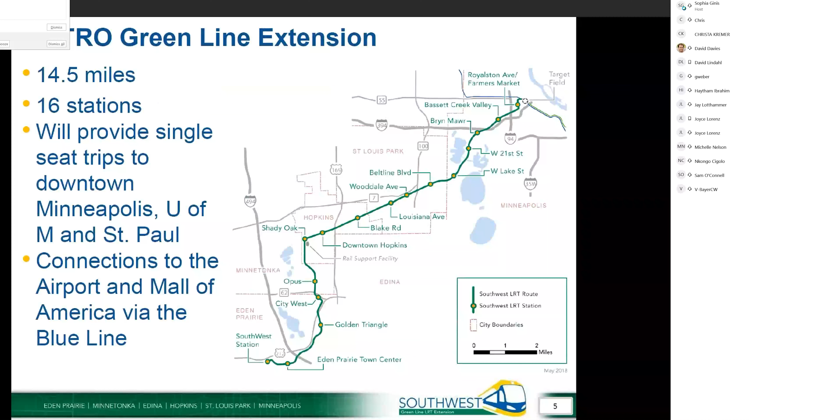Today we're going to do a little overview of the past year and what to expect. As you're probably familiar with the project, we are 14.5 miles with 16 stations, and not only can you connect to points along the line such as Hopkins or downtown Minneapolis, you're also connected to our regional network, allowing you to go on the Blue Line all the way to Mall of America or to St. Paul.

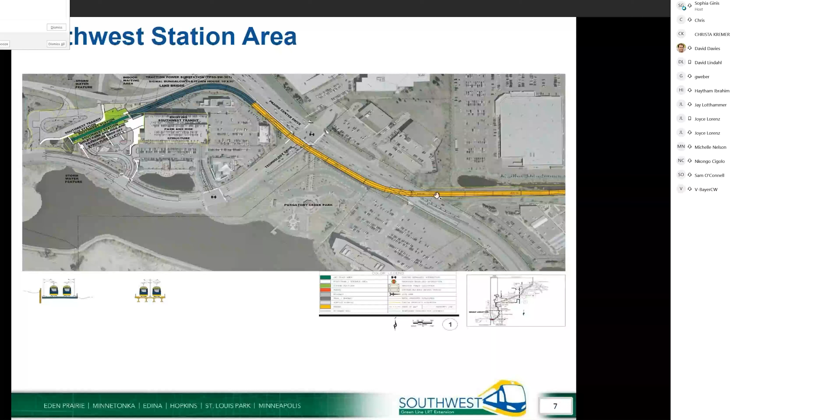We're going to walk through the alignment a little bit in Eden Prairie. To start out with, we have our Southwest Station, and from that we have a bridge structure that flies over Prairie Center Drive.

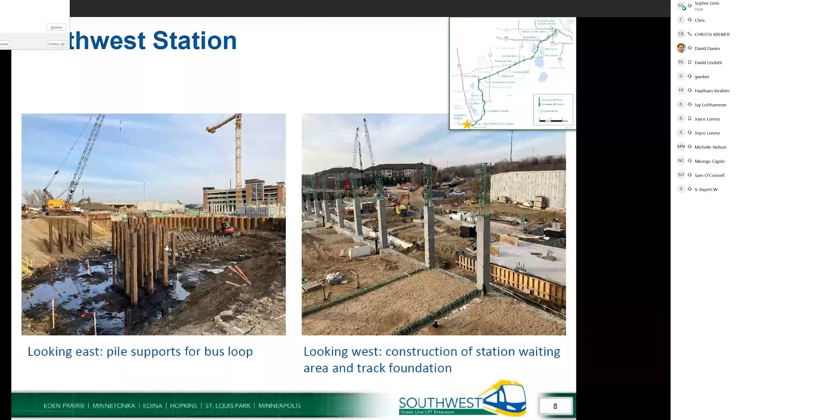Now, to put plans into reality, here are some pictures of what we've actually been doing on the ground. To build this Southwest Station, there's a lot of soils to be corrected and structures to be built. In this photo you see us expanding the park and ride structure, which is actually part of the station itself, and some of the infrastructure needs lots and lots of piles. So that is what we've been doing.

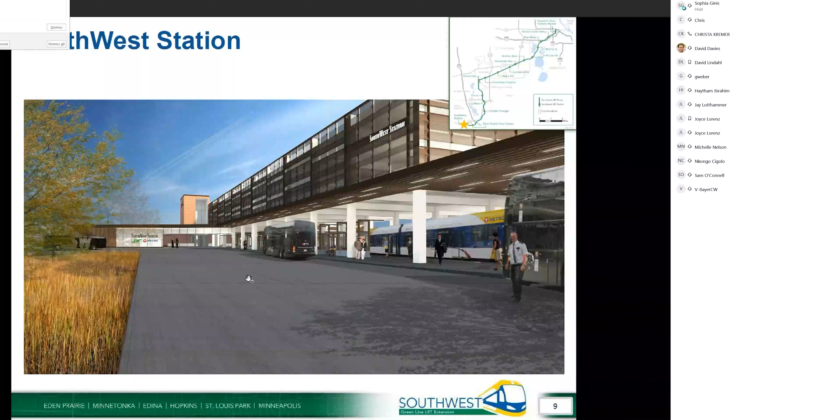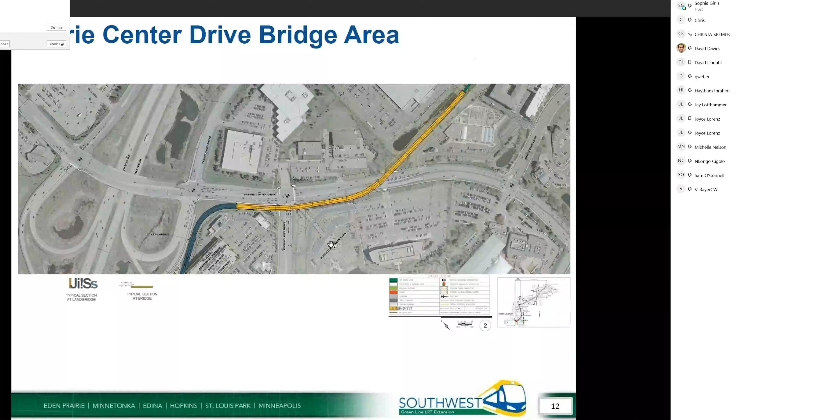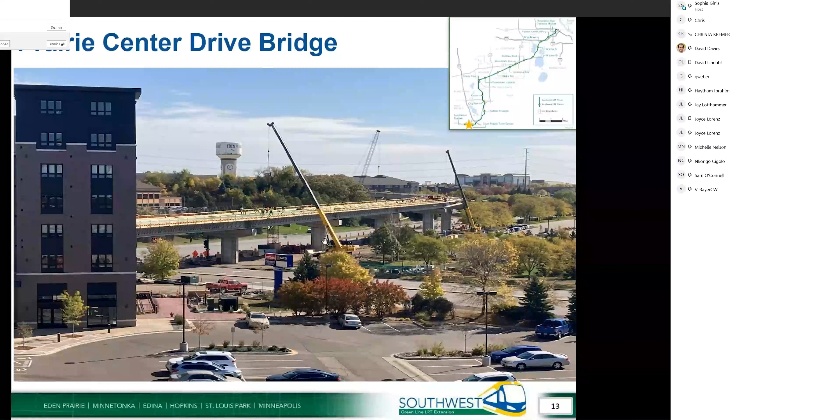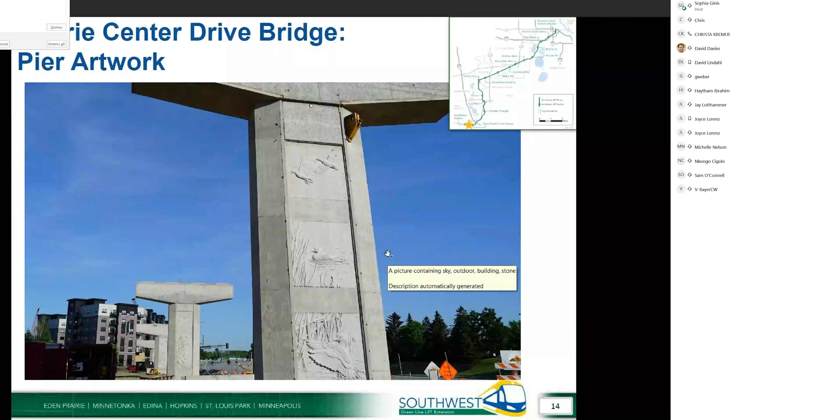Coming from the station, still seeing Southwest in the corner, we take a bridge structure across Prairie Center Drive. For anyone that's by there, that bridge is really coming together. Here is plans to reality - this is looking east towards the bridge itself across the roadway, in that parking lot. While this is before the beams were set, working with the Eden Prairie team, the Southwest team really made sure this bridge was aesthetically pleasing with some really awesome concrete insets. If you ever have time to wander that way, you can see the details on this bridge.

As we move on from the Southwest Station, our next station along the line is Eden Prairie Town Center, and that's also where we connect up with Flying Cloud Drive. I'll show you some of the work we've done in the last year in this area.

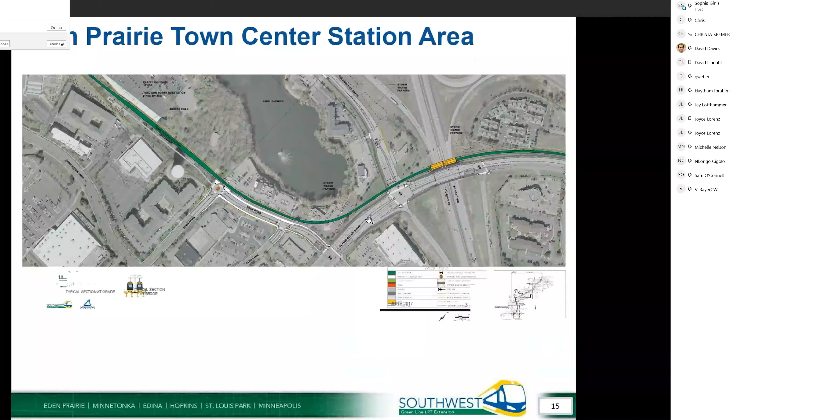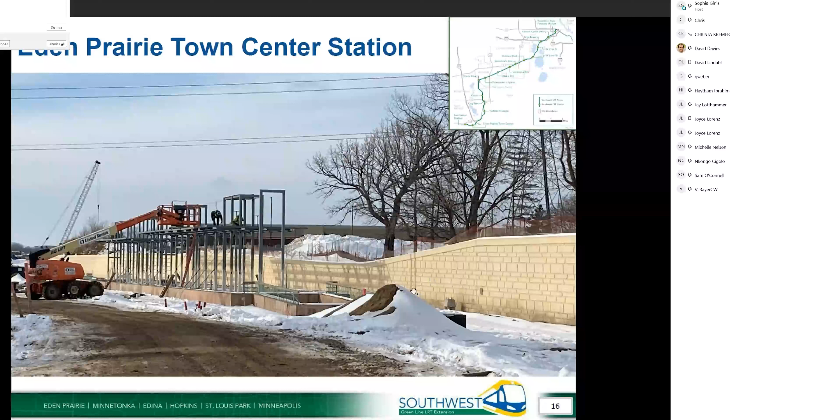So here's another station becoming a reality - this is the Eden Prairie Town Center station. You can see the structure starting to take shape and some of our retaining walls. We have quite a few retaining walls overall on the project.

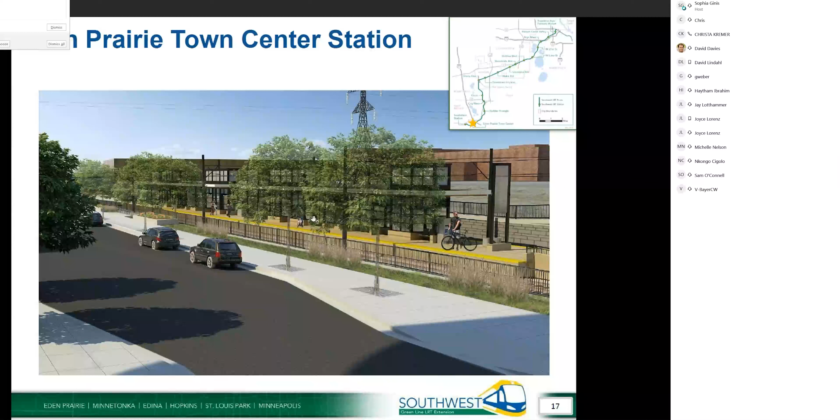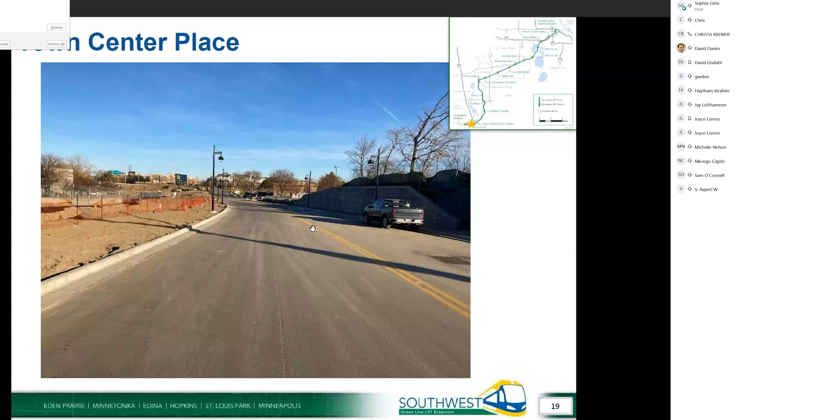I have a couple images of the roadways, and I'm bringing these forth for all of our residents and businesses that were along Flying Cloud Drive or Town Center Place, we had quite the construction season and had the roadways torn up for most of it. You can see the finished condition close to Town Center Place, as well as Flying Cloud Drive.

We'll get into this as we go through what to expect next year, but we have more work to do on Flying Cloud Drive. We were able to finish the first two phases, and we have two more to go.

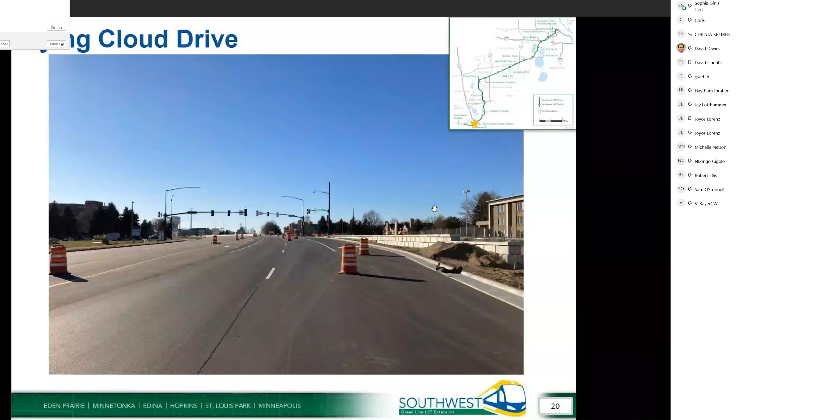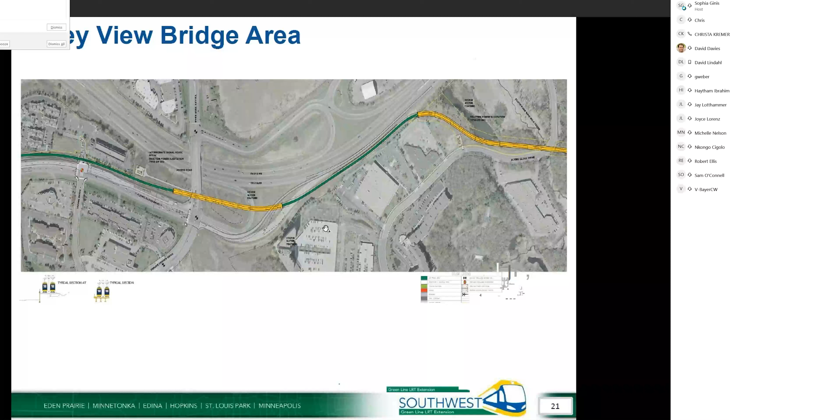As we move north or east along the corridor, we come into a lot of bridge structures, including the Valley View Bridge as well as the 9 Mile Creek Bridge. I'll have some photos of that. All these bridges together really show the structure that is Eden Prairie, and luckily we've gotten through much of the construction of a lot of them, so next year will be calmer in terms of bridges.

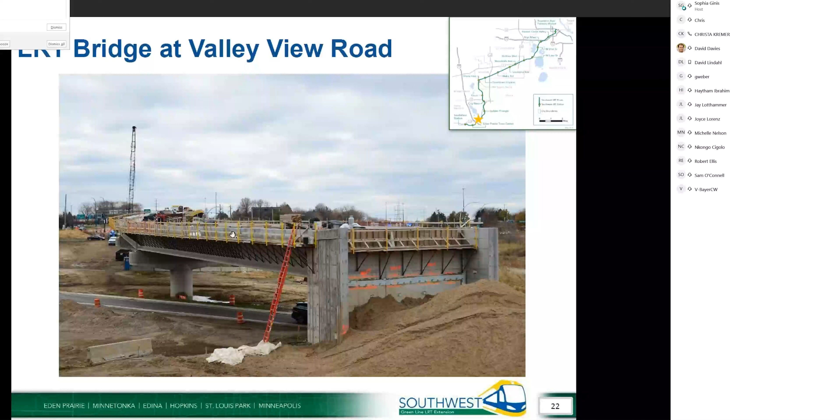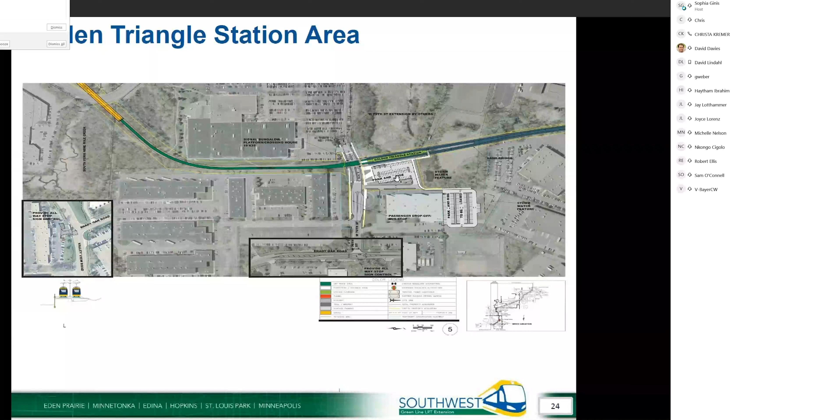Next along the line is our Golden Triangle Station and the associated area there. So again, plans to reality — the Golden Triangle Station has greatly taken shape over the last year.

You can see not only the station itself, but the support for the tracks that come around the station. A lot of Eden Prairie has soil correction to do, so they do a lot of either piling or removing and replacing soil to get it to be a place where we can build LRT over.

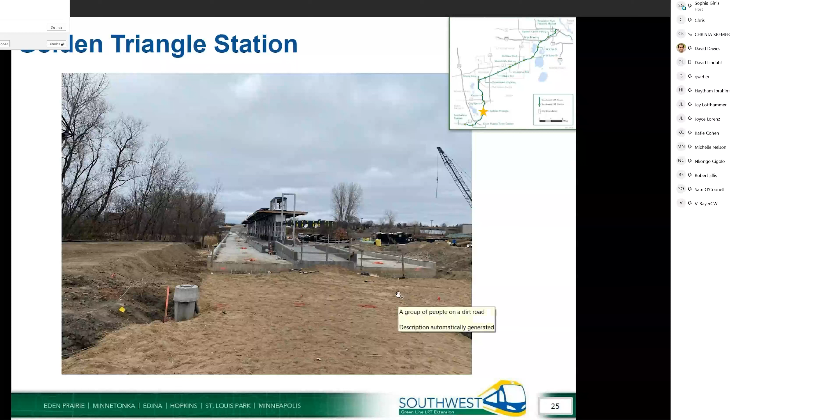Moving on, right after we leave that station, we have a big task to do, which is to get over 212. So we have a fairly large Shady Oak Bridge that goes over both Shady Oak itself and the highway.

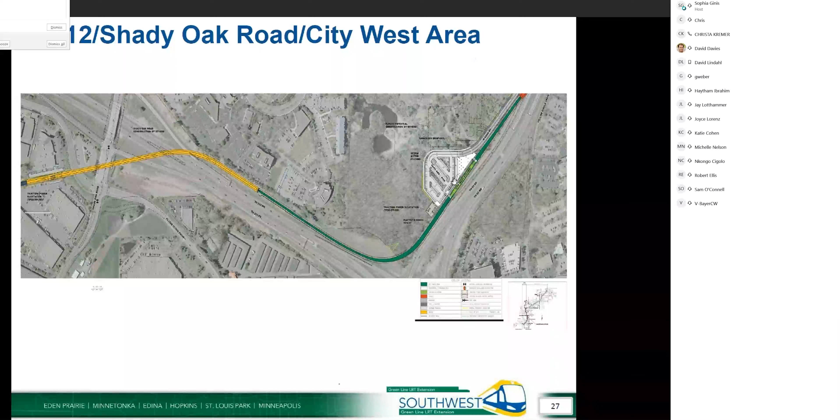We then come into our last Eden Prairie station, which is the City West station. It's located right by Highway 62, and then we dive under the highway in a tunnel. A lot of work has happened in this area as well to advance the project.

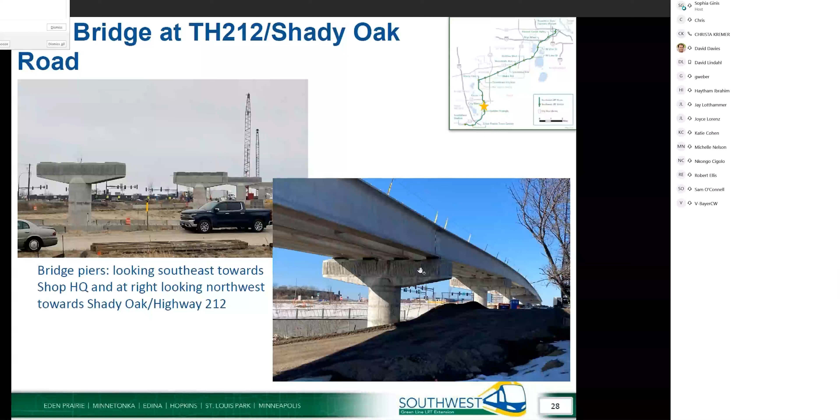Here is a view of our Shady Oak Bridge. Many of you got the lovely pleasure of seeing road closures on both Shady Oak and Flying Cloud Drive over the last few weeks as we've set these spans at the beams for the bridge itself. We still have the portion that'll go over the highway itself to set, as well as a lot of deck work to advance on top of these beams over the next year.

Here's what our City West station will look like once we fully hit reality, and not just construction chaos.

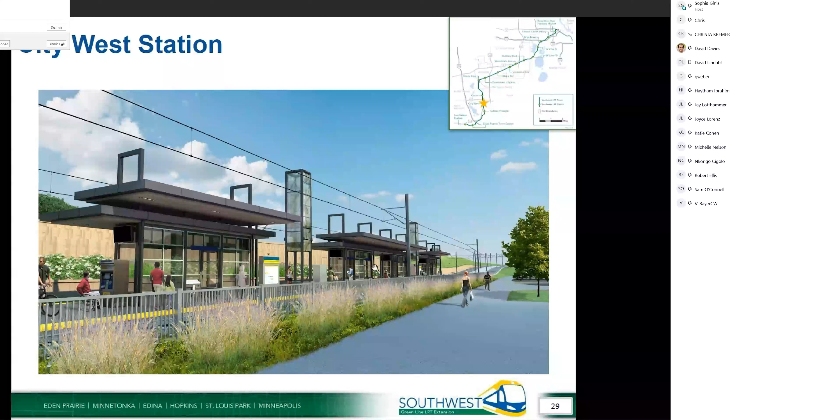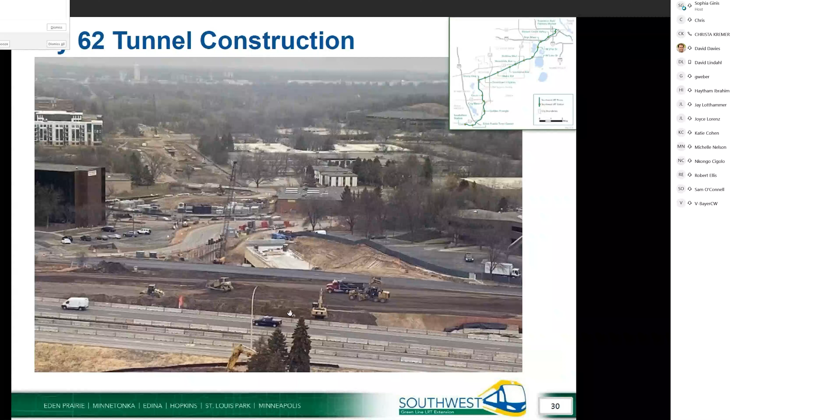Lastly, this is an image from earlier in the year of when they finished the structure of the northern half of the tunnel, and we were able to realign the roadway so that digging can now start on the southern end to advance our tunnel.

So what can we expect in the next year when it comes to Southwest LRT in Eden Prairie? We have a lot of work to do in that Southwest station that we mentioned.

Most of the bridges still have a significant amount of deck work to complete, though most of the structures are getting much nearer to completion. A lot of that initial piling and moving of things is most noticeable, and even some of the beam setting is really getting complete on most of these.

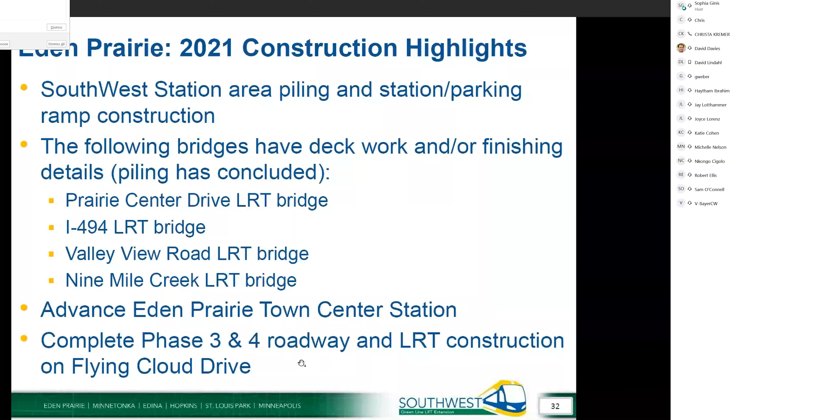We have our stations to advance, as well as a lot of work on Flying Cloud Drive that will have roadway impacts, and I have a slide with that. Like I said, advancing some of our bridges and advancing Highway 62.

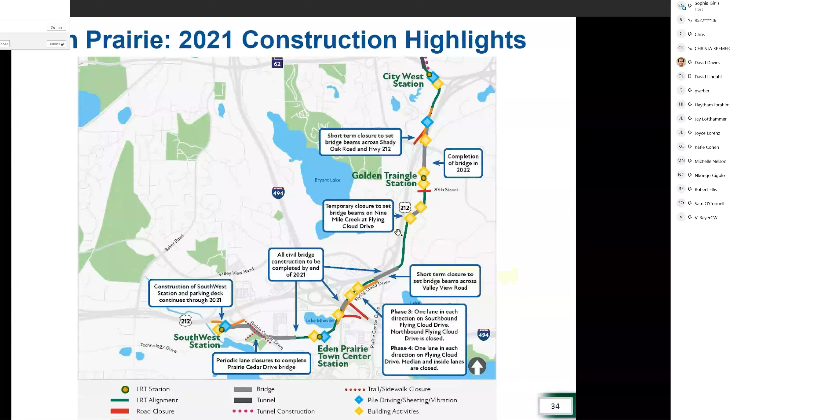Here's an image of where we'll be working in Eden Prairie over the next year, and really it is still kind of the whole thing, but just highlighting some of those areas. The phase 3 and 4 on Flying Cloud Drive will necessitate some lane impacts, and then we'll continue work on our major structures and connecting infrastructure as we make our way through the year.

So that's kind of a high-level overview. Of course, we'll take tons of questions about that at the end. But just a little last-minute summary of James's efforts out in the corridor.